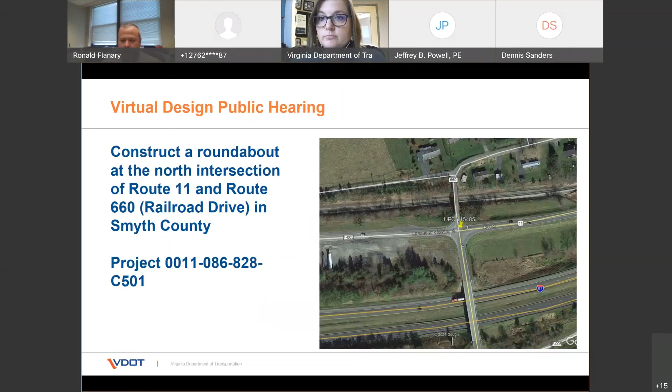Given the unique circumstances of the COVID-19 outbreak, along with our commitment to protecting public health, VDOT is conducting this virtual design public hearing to avoid in-person contact. This presentation will cover the same information that Bristol District staff would have shared during an in-person meeting. However, the comment process will be different. Details on how to submit your comments and have your questions addressed will be covered later in this presentation. All project information can be found on VDOT's website.

You may have attended previous public hearings conducted by VDOT. However, for the benefit of those that have never attended one, I would like to explain why and how VDOT conducts a public hearing.

A public hearing has four essential purposes. First, to inform the public on the status of the planning of the project and to present the recommendations based on the design to date. Second, to describe the project so that those attending can determine if the project will affect their lives and property. Third, to provide the public an opportunity to see information and express their views at this stage in the planning process, when flexibility to respond to comments still exists before design decisions are finalized. Lastly, this hearing is also used to develop a record of public views and participation to accompany recommendations for subsequent decisions.

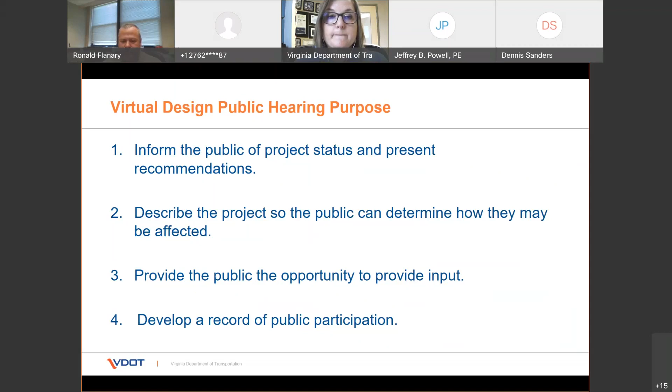We have a few members of the team online with us today that I will introduce: Tamara Pritchard, the VDOT Bristol District Location and Design Engineer; Michelle Earle, Bristol District Communications Manager; Maurice Hughes, Civil Rights Specialist; Richard Buckingham, Hydraulic Engineer; Dennis Sanders, Assistant Environmental Manager; David Duncan, Right-of-Way Manager; Jeff Powell, the Assistant Structure and Bridge Engineer; and Andrew Payne, out of the central office, the Project Design Engineer.

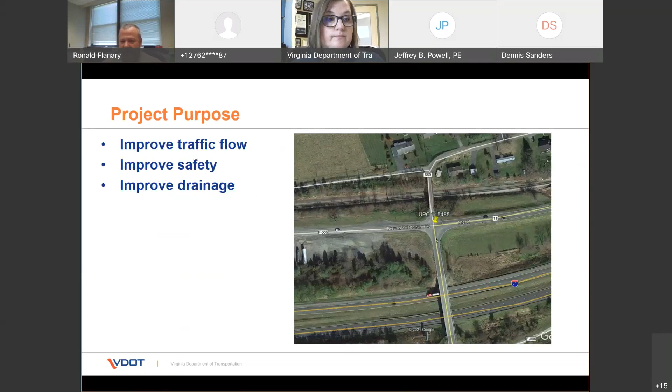The roundabout will have a single 16-foot travel lane, 24-foot truck apron, and 40-foot center island. The roundabout will have a concrete curb and gutter with grass in the middle. Additionally, the connecting road segments will have 13-foot down to 12-foot opposing lanes and will use both curb and gutter and shoulders.

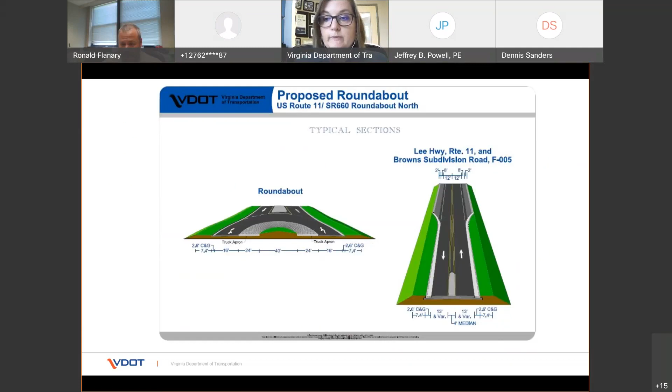Features of the Route 11 660 roundabout project include constructing a 120-foot diameter roundabout, constructing a concrete truck apron and raised splitter islands to control traffic flow, and connecting two segments, Route 11 and Browns Subdivision Road.

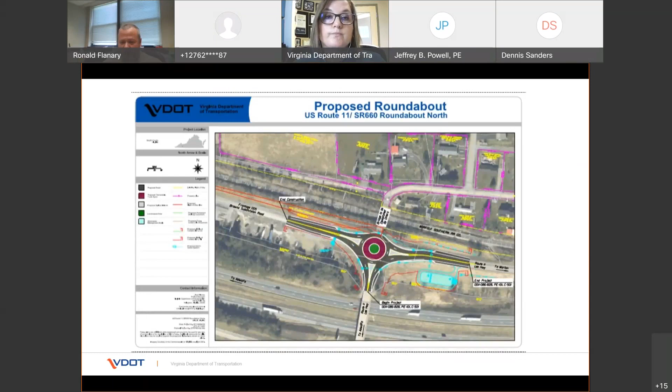Technical documentation for this project has addressed the potential environmental impacts identified in the preliminary engineering process. These areas of consideration include archaeological resources, historic resources, wetland waters of the U.S., biological resources, and hazardous material.

For specific information regarding the environmental review for these projects, the environmental documentation for each project is available on the project webpage that led you to this presentation.

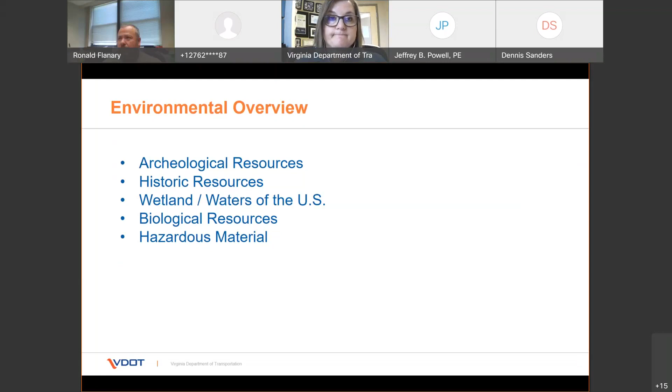As the design is developed, VDOT will determine what right-of-way and easements will be needed to accommodate the construction. Property owners will be notified of the exact location of the right-of-way and easements needed during the right-of-way acquisition process and prior to construction. Right-of-way acquisitions will begin in late 2022, early 2023.

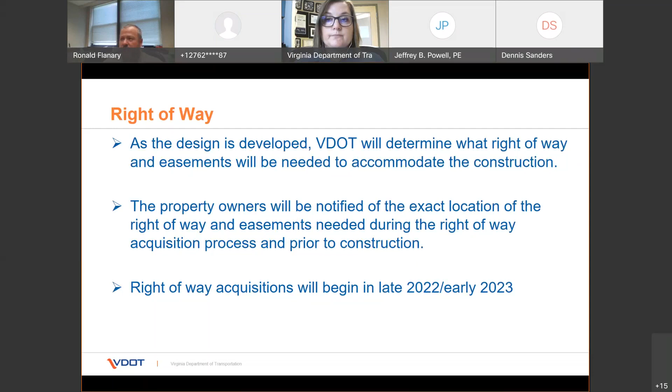All right-of-way acquisitions will be completed in accordance with the Uniform Relocation Assistance and Real Property Acquisition Policies Act of 1970, as amended in 1987.

The acquisition of necessary rights of way for this project will be handled by VDOT. All proposed acquisitions will follow federal and state laws and VDOT policies and procedures. The Uniform Relocation Assistance and Real Property Acquisition Policies Act of 1970, known as the Uniform Act, is the federal law that is followed for appraisals, negotiations, and relocations of families and businesses.

Each property will undergo a valuation process to determine the fair market value for each acquisition. During negotiations, the landowner will receive a copy of the acquisition valuation, a title examination, a bona fide offer in writing for the acquisition, along with all pertinent construction plan sheets. The VDOT negotiator will communicate with the landowner to ensure all questions, comments, and concerns are addressed.

As Michelle said, this is not necessarily part of this public hearing, but there was a lot of people who've shown interest, and we appreciate everyone's interest regarding this. So we wanted to give you this update today and tell you where we stand. This is not the project VDOT's developing in the roundabout, but this is for the bridge replacement, which you can see here.

It is adjacent to the roundabout, and we appreciate everyone's interest that they've shown in the bridge. I'm going to provide you with an update on the status.

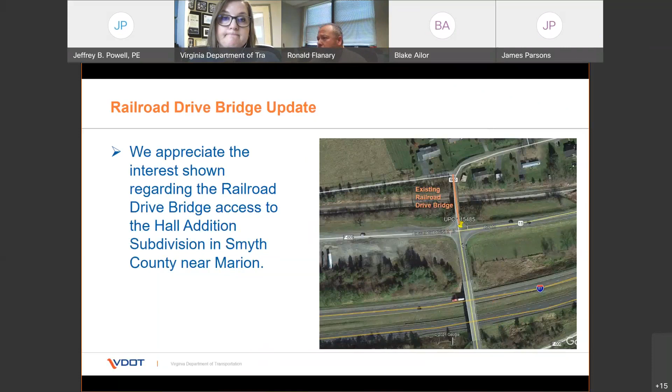Since the bridge was closed in 2014, we have considered a number of alternatives to address the access concerns of the subdivision residents and identify funding to replace this structure. Due to the railroad regulations and the proximity of the Railroad Drive Bridge to the Route 11 intersection, which is the emphasis of this hearing...

...it's not possible to replace the bridge with a new structure in its current location. Our plan is to build a new structure to the west of the existing bridge, which will meet the required clearances for the railroad and provide a second access into the subdivision.

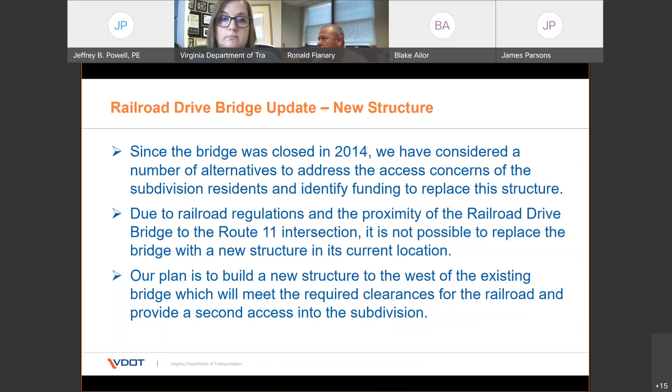The funding available for this type of project is awarded on a competitive basis. We've included this project in applications for state of good repair funding over the past few years. However, due to other priorities across the state, it was not selected. This year, the bridge replacement project has been selected as a potential candidate pending CTB approval for funding.

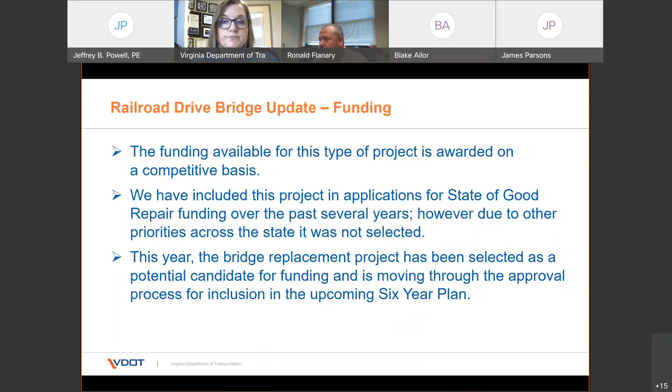It is moving through the approval process for inclusion in the upcoming 6-year plan. The 6-year plan identifies projects to be funded over the next 6 years and is typically adopted in June by the Commonwealth Transportation Board. So we're about in June, so we'll have that process here shortly.

Once funding is received, the design of the project will begin with the PE and right-of-way, and construction to follow in subsequent years. The current 6-year plan is for fiscal years 2022 through 2027. That means this project, if approved in the plan, should receive funding beginning in approximately fiscal year 2026 or 2027, which is calendar years 2025 or 2026.

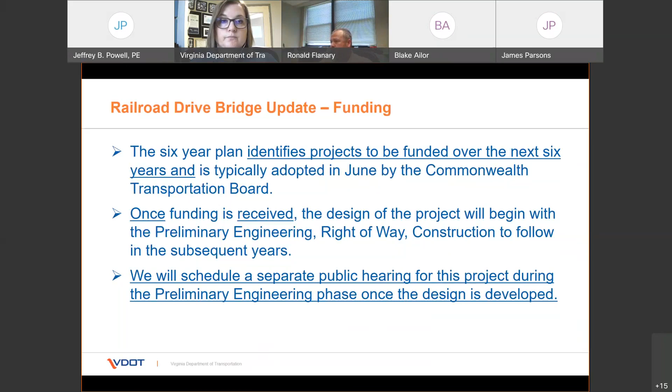We will schedule a separate public hearing for this project during the PE once the design is developed, and we will not be accepting comments on the bridge project at this time. We're just giving you an update as part of the Roundabout project.

Our goal is to replace the existing bridge with a new structure, providing access to the subdivision, improving the safety of the roadway, and minimizing delay to the traveling public. We continue to look for opportunities to move this project forward, and your input is valuable to realizing this goal.